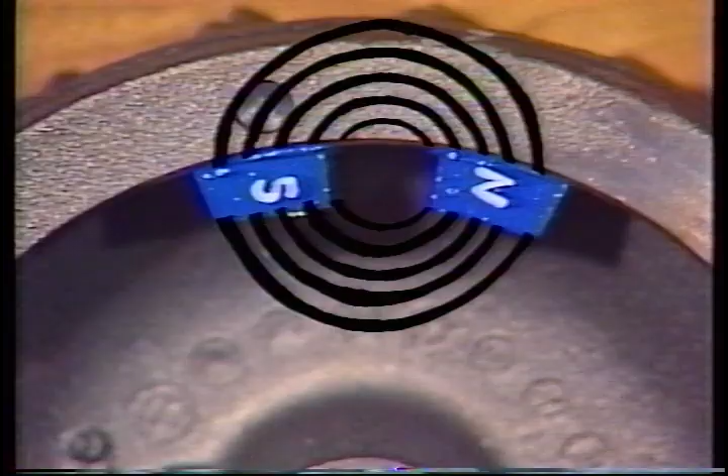The first item needed to create electricity in the ignition system is a magnet. There is a magnetic force field sent out between the north and south poles of a magnet. When a conductor is passed through this force field, electricity is generated. This conductor is the soft iron sheets that form the core of the system. The lamination core is riveted to the stator body.

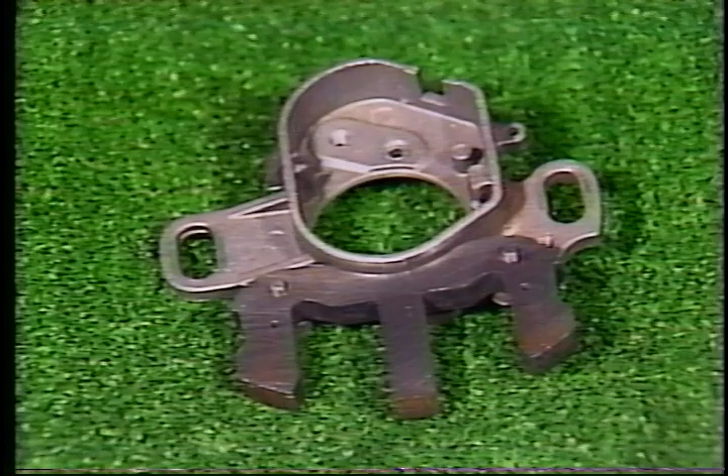When the north pole of the magnet is in line with the center leg of the laminations and the south pole aligns with the left leg, the magnetic force fields are routed through the conductor's center leg. As the magnet continues to rotate, the north pole aligns to the right leg of the core and the south pole is then located at the center leg. This reverses the direction of the magnetic force field through the center leg of the lamination, creating electricity.

This electricity passes through a primary coil of copper wire wrapped around the center leg. Let's take a look at how Tecumseh winds the coil primary. The primary is formed by winding copper wire a specified number of times around itself. The spray that is visible is acetone. This allows the wire to adhere to itself and form the core.

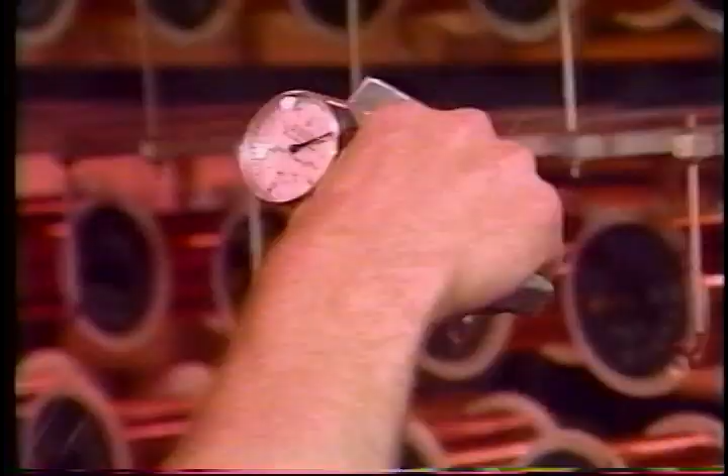To increase the voltage to an excess of 15,000 volts at the spark plug, a secondary winding of copper wire is required. The wire in the secondary winding is thinner than most human hair. The wire is soldered to the terminal connection. This connection transfers the electricity from the primary to the secondary.

The spindle will wind 35 secondaries at a time. The machine automatically cuts and inserts the paper insulator between every layer of wire. There are approximately 75 layers to each secondary.

The breaker points of the engine serve two functions in the engine. First, they stop and start the flow of electricity in the primary of the coil. When the points are closed, electricity flows in the primary. When they open, the flow of electricity in the primary is forced to the secondary windings. The voltage is increased and sent to the spark plug.

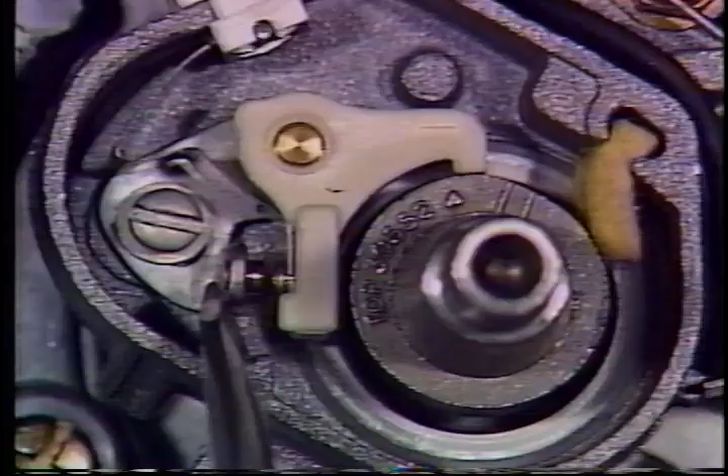The second function of the points is spark duration at the plug. The wider the point setting, the longer the spark is available at the spark plug. This ignition cam is the device that opens and closes the points. The cam has a high spot called a lobe to open the points at a set degree for the engine. The position of the magneto keyway in the crankshaft is what sets the dwell in the engine timing.

The cam wiper is a piece of oil-impregnated felt material that lubricates and cleans the cam. Re-oiling of the wiper is not recommended. It is best to replace it.

The condenser acts like a shock absorber in the electrical system. The condenser takes a charge and holds it until it is discharged. The charge of voltage is always the same. This prevents arcing at the points. The center of the condenser consists of two strips of foil separated by an insulator. The foil is tightly wound and placed inside a paper insulator so that it doesn't ground out against the condenser body.

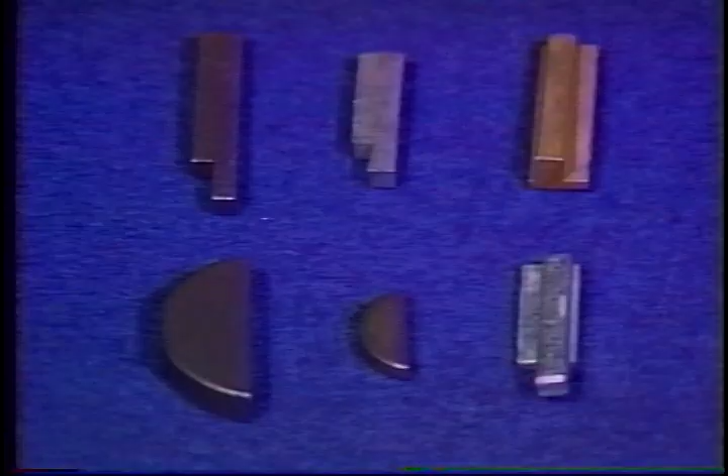The flywheel key is the device that properly positions the magnets in the flywheel to the magneto system so that the electricity is generated when it should be. When the 15,000 plus voltage is sent down the line, it exits at the electrodes of the igniter, known as the spark plug. The gap at the electrode also determines the way the engine will run.

If all of these components are put together, a complete standard point ignition system is formulated.

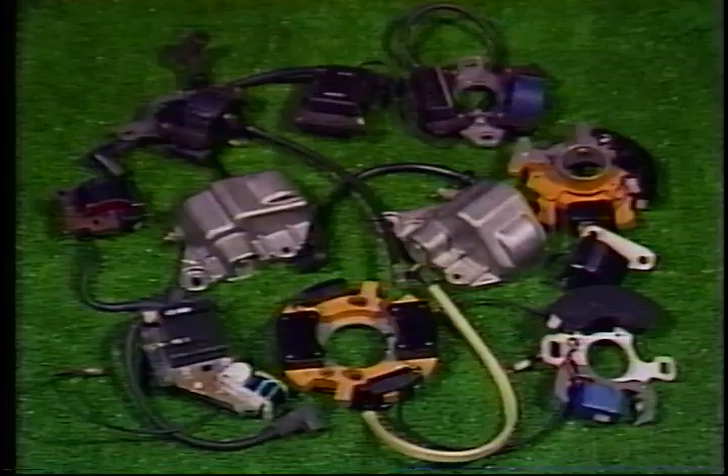There are several forms of solid-state ignition systems. The type that is going to be explained in this program is Tecumseh's capacitor discharge ignition, or CDI. Every manufacturer has a variety of systems and circuitry to achieve the same result. However, the same basic theory is used. It all starts with the rotating magnets in the flywheel passing the iron core laminations. This produces AC voltage.

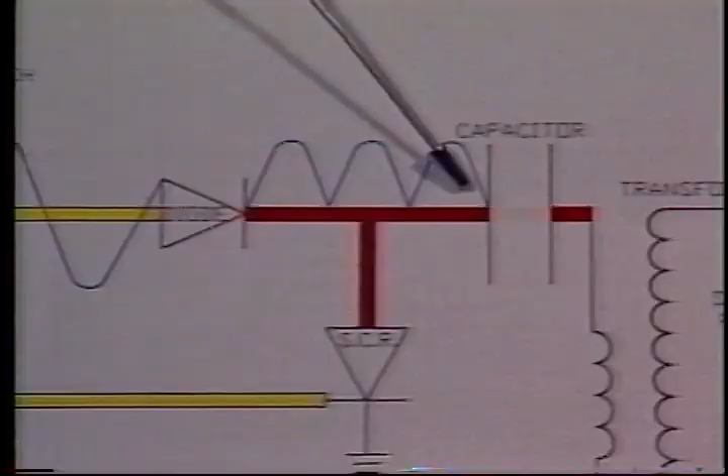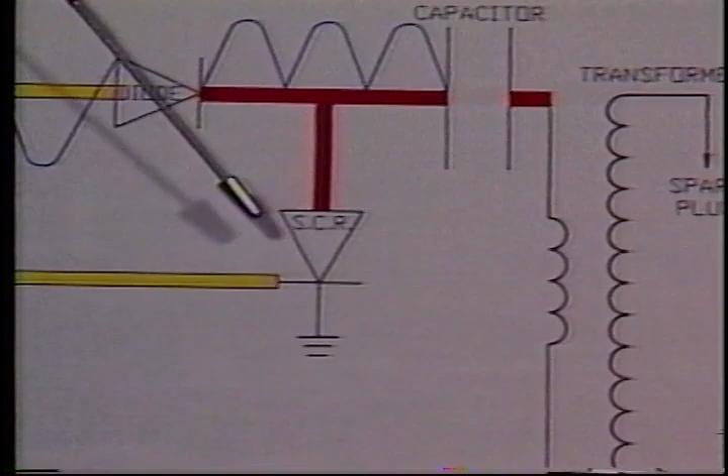There is a diode in series to convert the AC voltage into a pulsating DC current. The DC voltage charges the low-voltage capacitor. The capacitor serves the same function that the condenser does in the standard point ignition system. An electronic switch called an SCR turns on and off to unload and load the capacitor. The SCR is controlled by the small amount of voltage that is produced in the trigger coil of the module. When the SCR discharges the capacitor, the voltage is sent to the primary of the transformer.

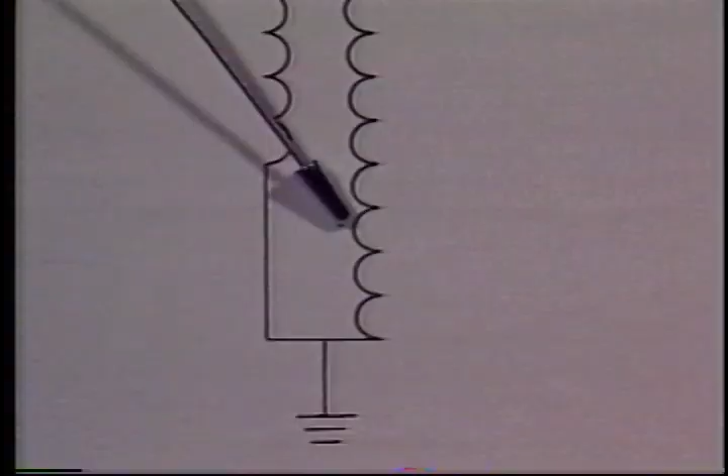There is approximately 190 volts in the module at this point. That 190 volts moves into the secondary windings of the coil and is stepped up to as much as 20,000 volts. The 20,000 volts is sent to the spark plug to fire the engine. The basic operating theory of standard point ignition and CDI solid-state ignition have been shown. One of the most important things to remember is that the ignition system is totally independent of all charging systems.

Excuse me, sir, what are you doing? Time out. What are you doing? Timing this engine. You're out of here.

We're going to talk about ignition timing today, but not in that sense. We're going to deal with timing solid-state ignition, the externally mounted coil with fixed-timed engines, and of course, standard point ignition. The simplest engine to time is the engine that is equipped with the externally mounted CDI solid-state ignition. The only tools that are required to time that engine are the 670297, 12.5 thousandths air gap gauge.

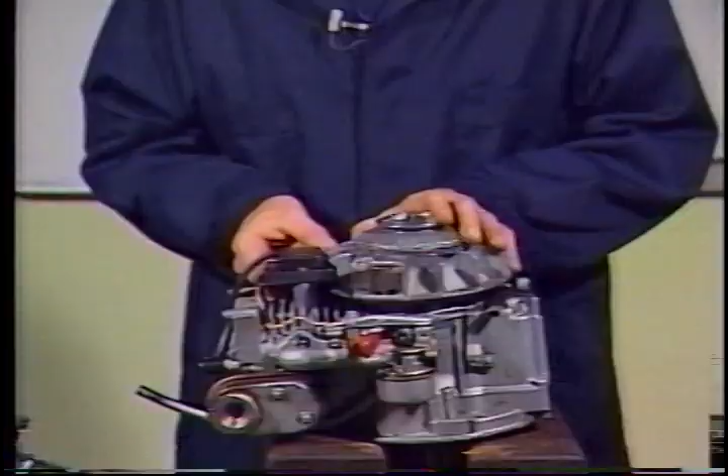You take the air gap gauge and place it between the flywheel and the solid-state module. You then rotate the flywheel so that the center of the magnets and the center leg of the lamination stack align. Once they have aligned, you can then loosen up the bolts holding the solid-state module to the engine. The magnetic pull of the flywheel will draw the laminations of the module to it. Once they've been drawn tight, you can then tighten up the screws again for the module, and then rotate the flywheel so that you can remove the air gap gauge.

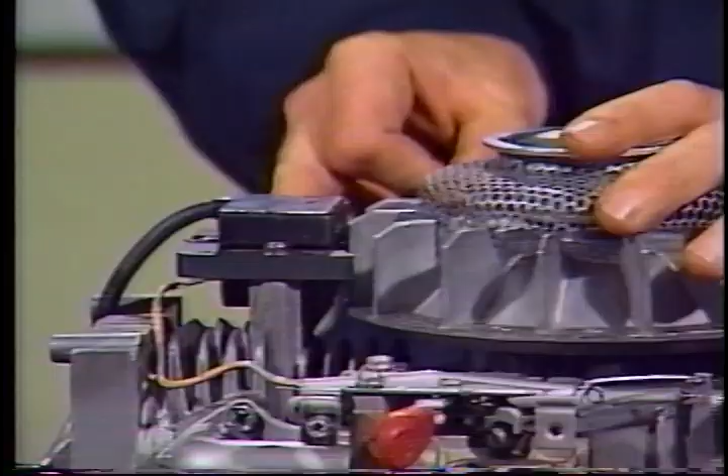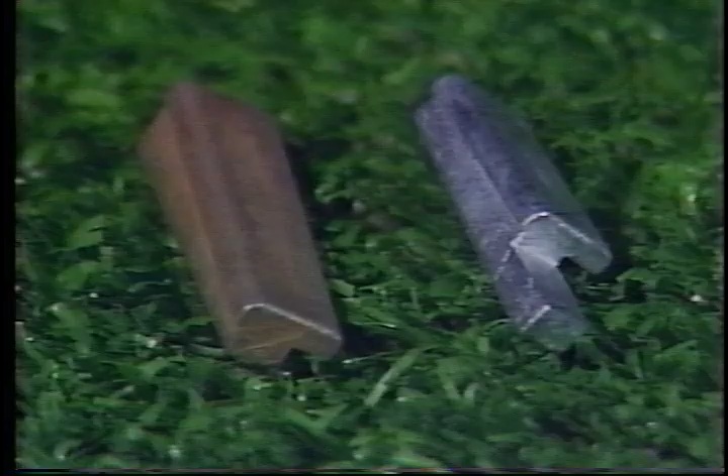One item you do want to check is you want to turn the flywheel to make sure that the magnets are not striking the laminations of the solid-state module. Another area that you want to make sure you have checked is that this engine uses a gold-colored flywheel key. The next engine that we're going to talk about will have the externally mounted coil and points and condenser underneath the flywheel. That engine will use a gray colored flywheel key.

When working with the engine with the externally mounted coil and points and condenser underneath the flywheel, it's as easy to time as solid state ignition with a few steps that we're going to show you. We have already removed the starter cup and flywheel nut, and as you can see by looking at the cord holes on the flywheel, we have used a flywheel puller to loosen the flywheel. It is very important that when working with two-cycle engines that you do not use a knockoff tool because of the needle bearings and ball bearings in some of the applications.

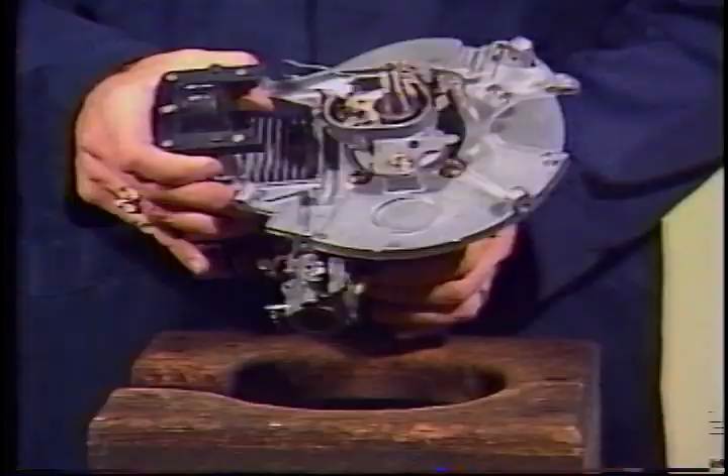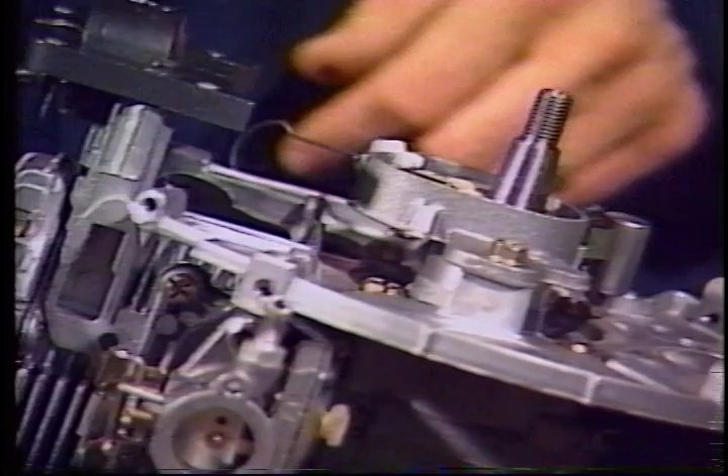After the flywheel has been removed, you can loosen the dust clip and remove the dust cover. If you're servicing this engine for the customer, of course you're going to change the points and change the condenser. After you have changed the points and condenser, to properly time this engine, rotate the engine so that the rubbing arm of the points is on the highest point of the ignition cam. Once the rubbing arm of the points is on the high side of the ignition cam, you can set your points.

Now with the externally mounted coil, the point setting on all engines is 20 thousandths. You can loosen the screw that holds the points down, and inside the stator body there is a casting so that the blade of your screwdriver will fit in there so that you can move the points out or move the points closer together so that you don't have to bang and push and pry the points open and misalign them. Now a thin blade feeler gauge generally works considerably better than the wide blade that I'm using now. But you set your points at 20 thousandths and tighten them up.

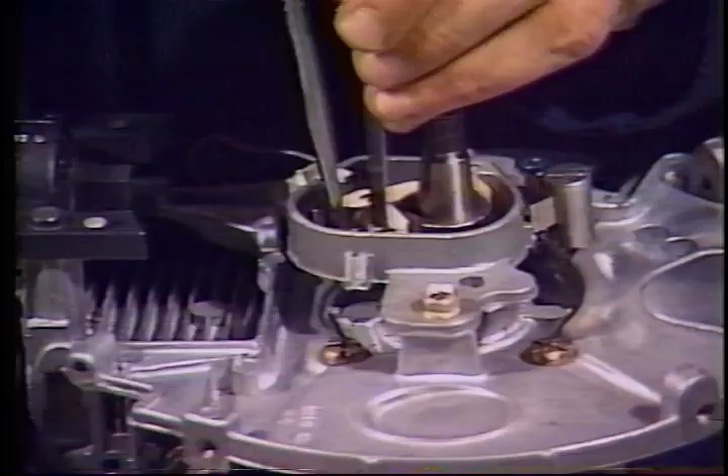I think a common complaint that I often hear is that the points have a tendency to spread when you tighten the screw back down. So you do have to be somewhat careful when you tighten them down to get them tight enough to hold, but not to force them out. And as we set points, we're all going to have a different feel on the feeler gauge for 20 thousandths.

After the points have been adjusted, you need to clean them. So you can use a piece of lint-free bonded paper. The edge of currency works well as long as you don't get the green ink onto the point. So put the white edge in there, close the points, and draw the paper through to clean your points.

I don't believe in using point cleaner because many times the contact cleaner that is used is to remove the oil from the contact points. The problem there is that when you spray it in there, you can also be removing the oil from the cam lobe wiper that's in there to oil the cam. So using contact cleaner is not a good idea. You can then place the dust cover back on and the clip.

Now on the two-cycle engines that have the externally mounted coil, we use the same flywheel for both two-cycle and four-cycle engines. In two-cycle engines, we use a gray-colored sleeve adapter. Put the sleeve adapter into the flywheel and press it down flush. There are two tabs inside this adapter that now act as your key. So align the adapter to the keyway so that the two tabs are in the keyway.

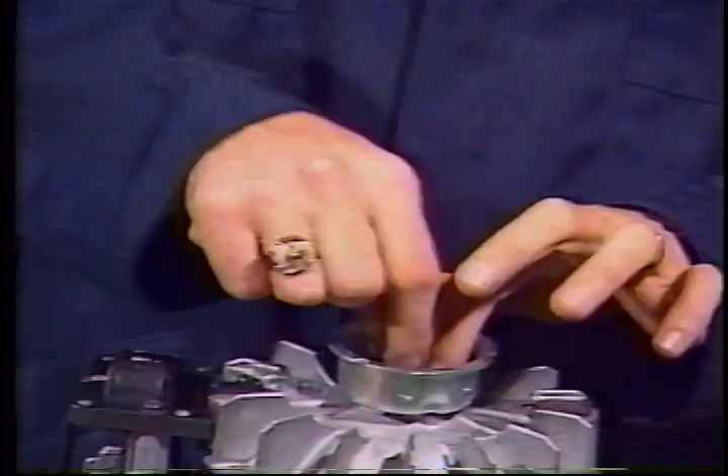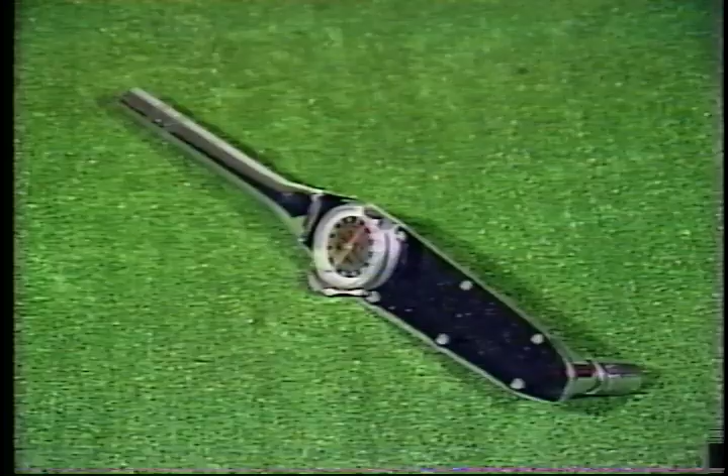Place your starter cup on and properly position it. Make sure that the crown on your washer is up and put your flywheel nut on. One of the most important tools that you will have as the service technician is a torque wrench. So make sure when you're working on any engine that you have looked up the specification for the flywheel nut and always torque the flywheel nut.

After you've torqued the flywheel nut down, again, take your 670-297 12.5 thousandths air gap gauge, place it between the laminations of the external coil and the flywheel. Rotate the flywheel so that the center leg of the lamination stack and the center of the magnets align.

And as before, loosen the bolts up and allow the lamination stack to be drawn to the magnet. You tighten the mounting bolts back up, rotate the flywheel, remove the air gap gauge, and again, check to make sure that your magnets are not striking your lamination stacks.

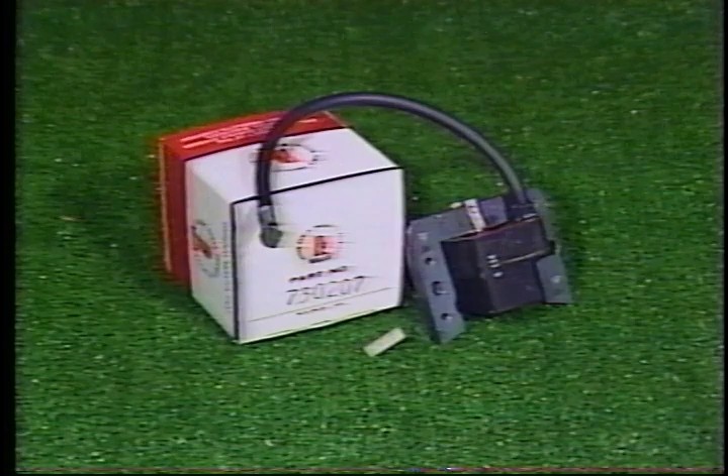An important thing to remember when talking about this externally mounted coil: if in your testing and checking with ignition testers you find that this coil is bad, you must be aware now that you will receive a 730-207 solid state ignition kit. The coil has been obsoleted, so you will get solid state ignition now. When you get solid state ignition and you have a 2-cycle, please make sure to remember to order the gold sleeve adapter. The gold sleeve adapter does not come with the 730-207 kit.

Now you have timed the engine and it can be put back together. That's the next simplest engine to time, the external coil, points and condenser underneath the flywheel. The final area that we want to address in ignition timing is the standard point ignition. The best place to start with timing and standard point ignition is in your mechanic's handbook. Turn to the proper section, chapter, and book that you're going to be using.

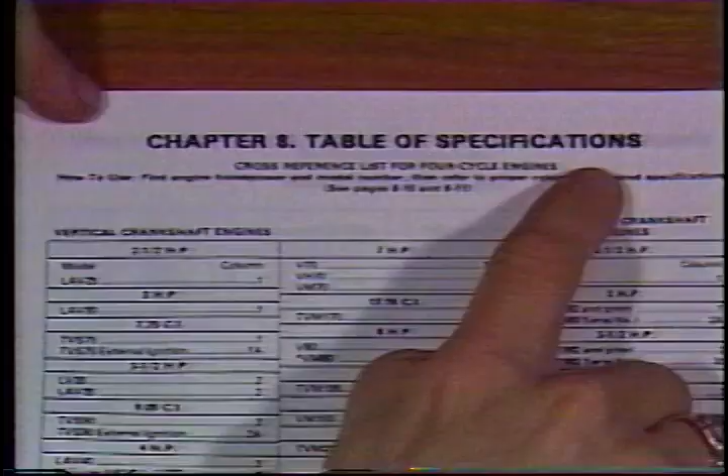Take your model number of your engine. The engine we're going to time today happens to be a V60. So in looking in the book, we find that V60 is located in reference column number 13. And turning to reference column number 13, we find that the before top dead center timing dimension is 80 thousandths before top dead center. We also find that the point setting is 20 thousandths.

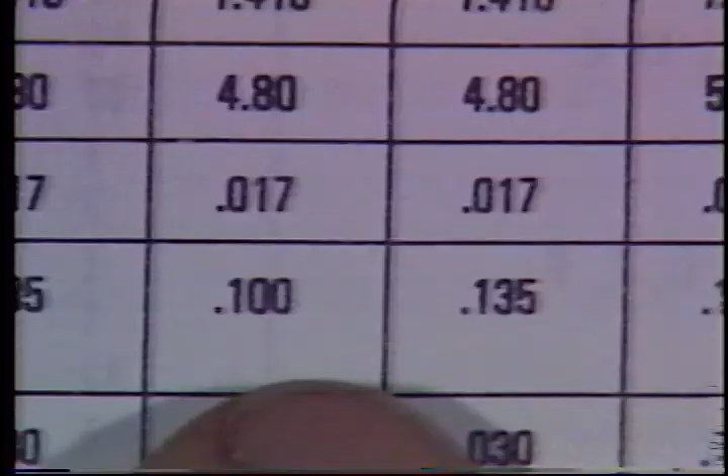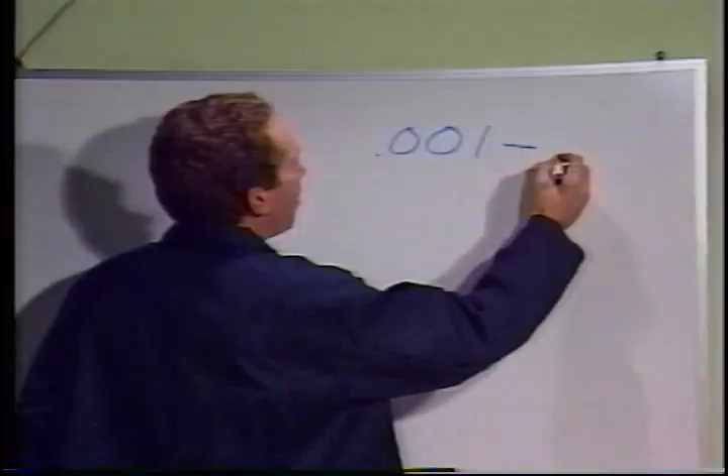An important thing to keep in mind is that not all engines have a point setting of 20 thousandths. Let's take a look in the 2-cycle book to show you an example of that. Now, as you scan the 2-cycle book, you will notice that not all point settings are 20 thousandths. Let's take a few moments and talk about point setting as it relates to timing. For every thousandth that you're off on your point setting, your timing is off 5 thousandths.

As we set points, we all know that we have a different feel on the feeler gauge for points. Your setting may feel like 23 thousandths to you. It may feel like 20 thousandths to me. Or to the gentleman here, it may feel like 17 thousandths. So it's important to get a consistent point setting and to time the engine.

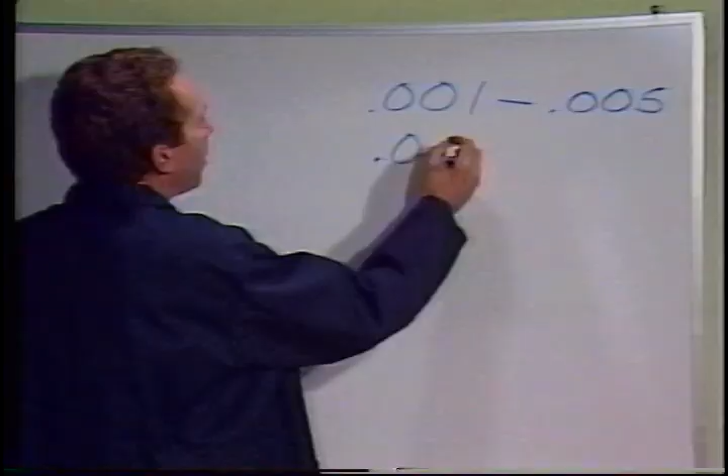In looking in the manual, we also know, as we've looked up, that the V60 engine that we're going to time has a timing dimension of 80 thousandths before top dead center. Let's take a moment and use the word that so many of us have always been told never to use, and it is not a 4-letter word, rather a 6-letter word, and that word is assume. And we know what assume does to you and to me.

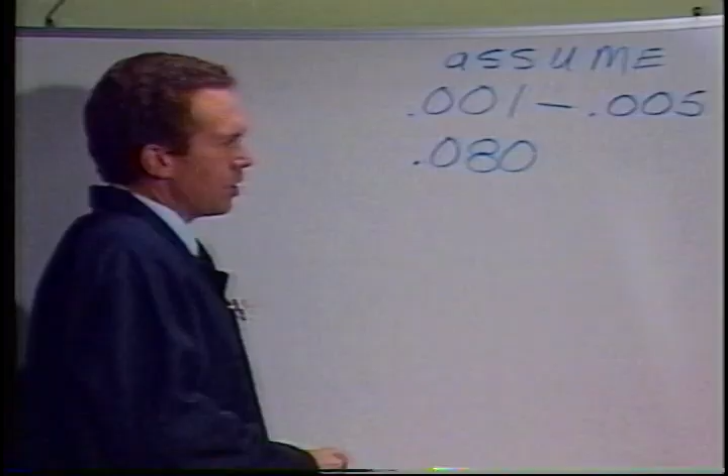So let's assume for a little bit what will happen to an engine if we assume they all have a before top dead center timing dimension of 80 thousandths. And looking in the book, we find an engine that is set at 60 thousandths before top dead center. We're now 20 thousandths out of time by an assumption.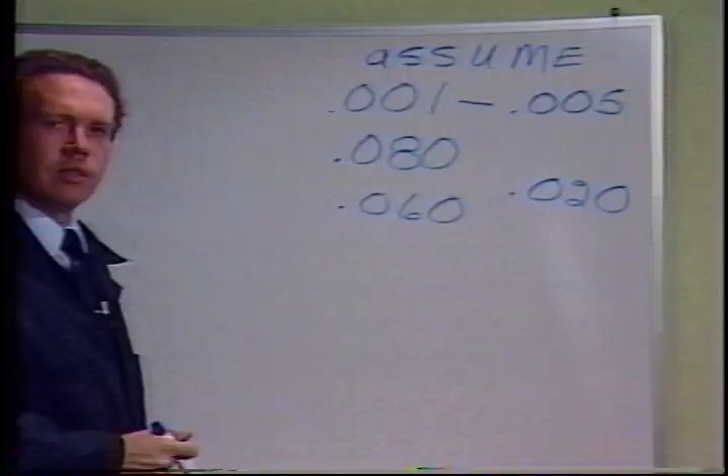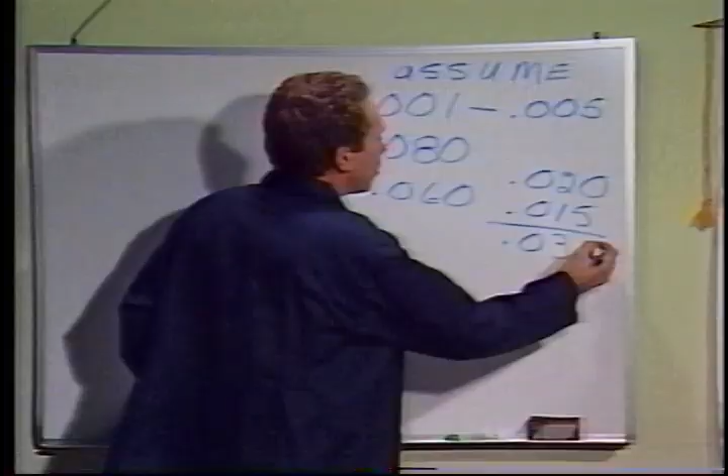And then the feel of the feeler gauge, which may feel like 20 thousandths to me and be 23 thousandths to you, we have a difference of 3 thousandths in the point setting. So therefore, we have a difference in timing dimension of 15 thousandths there. That gives us a total difference of 35 thousandths. The engine can be out of time that far just on point setting and not looking up the proper before top dead center timing dimension.

If that 35 thousandths is advanced, that's the engine that when you pull the recoil, it kicks back and it jerks your arm out of its socket, and we're all real thrilled about that. Or if that 35 thousandths is retarded, boy, that engine starts great, but it just doesn't have the power that it should when it's running.

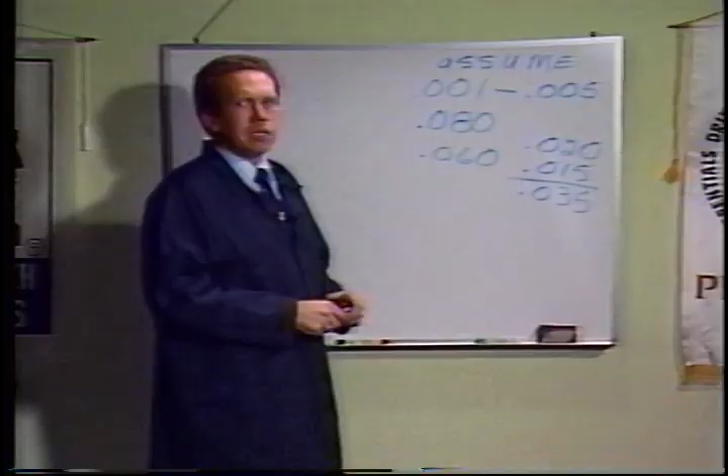So changing the points and condenser in the engine and the proper timing is to use the proper timing dimension, because the statement has been made so many times is, all I changed was the points and condenser. So therefore, I don't have to move the stator plate. All I did was change the points. Well, changing the points can throw you completely out of time with the engine. So it is important. And let's go back to the bench and go through ignition timing of the standard point ignition.

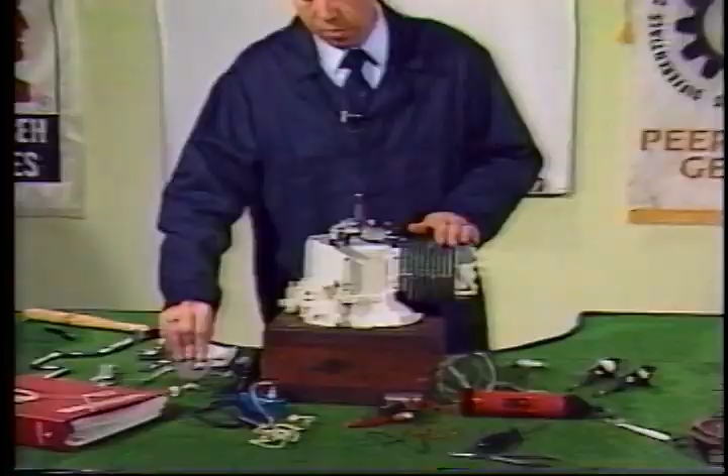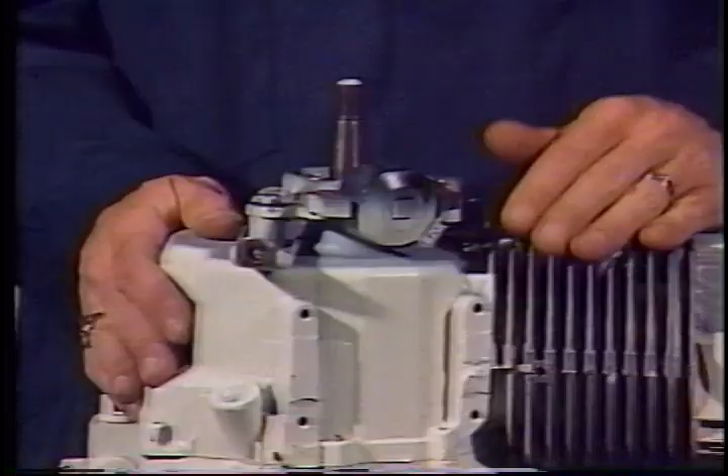After the flywheel has been removed from the engine, we can then get to the ignition components. First, we want to remove the spring clip that holds the dust cover onto the stator assembly. We can then change our points and our condenser and felt wiper for the cam lobe if necessary. We're going to point out some things that are important during this presentation that many times are overlooked and can cause ignition problems as far as timing goes.

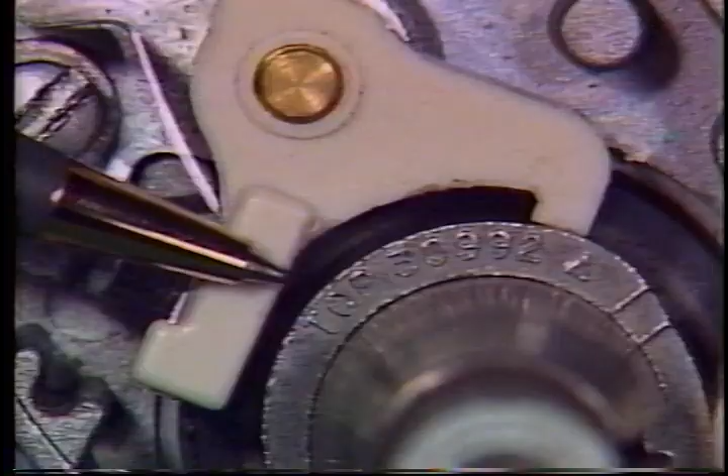One of those areas of concern is many times the ignition cam. The ignition cam has a giveaway that tells you the direction that it goes in. If you look on the ignition cam, it will tell you top. So therefore, it goes in so that it says top is on top. We have seen at times when the ignition cams have been put in upside down and the engine is 180 degrees out of time.

After the new points and the new condenser are in, let's begin to time this engine. Now there are a number of ways to find the high side of that ignition lobe. If the engine is out, many times you can reach underneath and turn the crankshaft of the engine by hand to find that high point. Or if you take the key, place the key back into the keyway, you can then use a wrench.

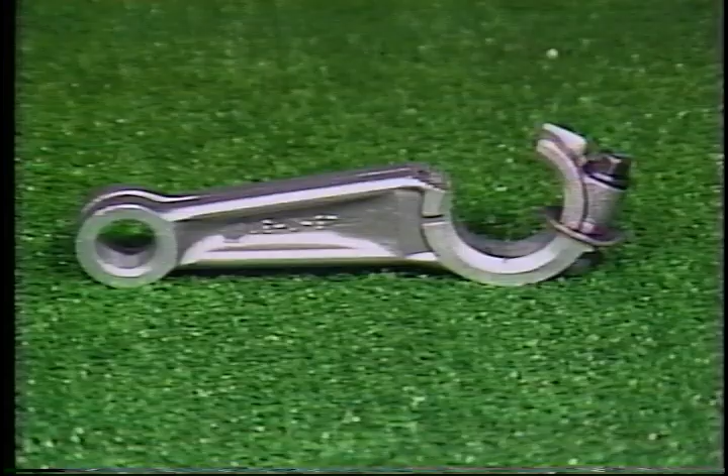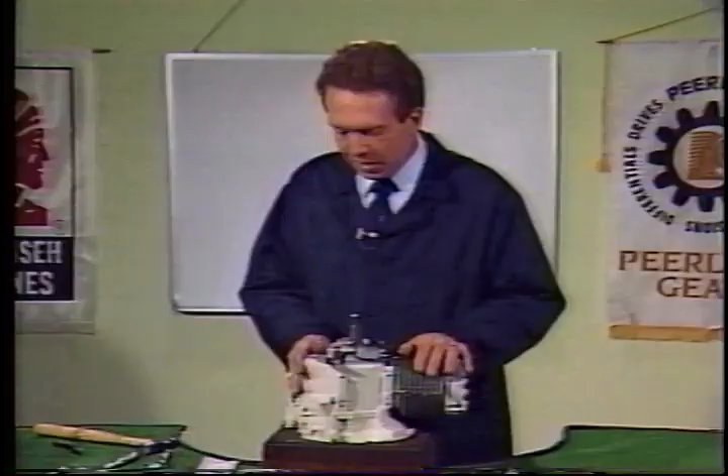Or one of the other ideas passed along to us by a servicing dealer was to take a connecting rod, cut the cap in half, place a washer between the leg of the rod and the cap, bolt it back together, and use the washer in the keyway to help turn the crankshaft. They all work well. Vice grips and the like on the taper of the crankshaft is obviously not a good idea. So now we have rotated the crankshaft in the engine so that the rubbing arm of the points is on the high side of the ignition cam.

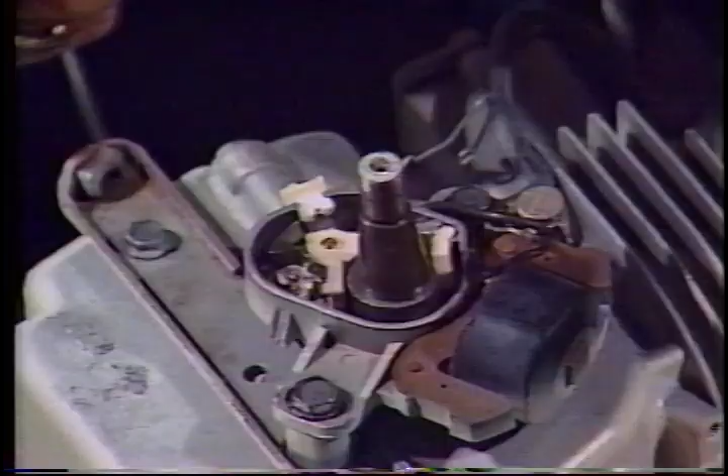It's now time to set our points again. And just as before, we can loosen the adjusting screw. This is a 4-cycle engine. We've looked in the manual. We found that the point setting is 20 thousandths. And again, we can use the boss in the stator body so that we can tighten the points. Now if you pull that feeler gauge out of there and it snaps, you know that your points are a little bit too tight. So loosen them up and again reset your points.

Setting the points should be done with a feeler gauge. It should not be done with the old business card trick or the matchbook cover. Those things do not condone good point setting. So make sure that you do use a 20 thousandths feeler gauge if it calls for a 20 thousandths point setting. After the points are closed, we want to find the proper before top dead center dimension.

The 670-241 dial indicator is the tool that we highly recommend for you to use. It comes with a thick leg up here in the adapter collar, and it has a thin tip on the leg of the dial indicator. When it comes to you, this leg will be straight.

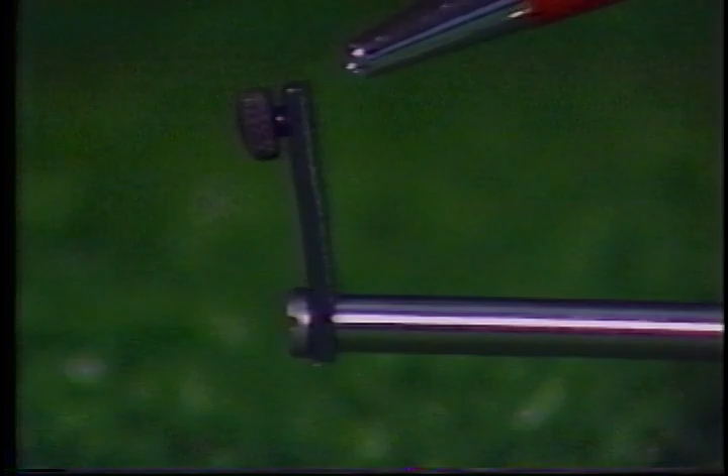One of the service tips that may help you is what we do is we take this leg off from the dial indicator, put it into the vise, and put about a 10-degree bend in the leg of the dial indicator. Then I use the thin tip, and the reason that I put that bend in the leg of that dial indicator is so that when you have the heads with the higher fins, especially in the 8 and 10 horsepower engines, you can then get the dial indicator into the spark plug hole of the engine.

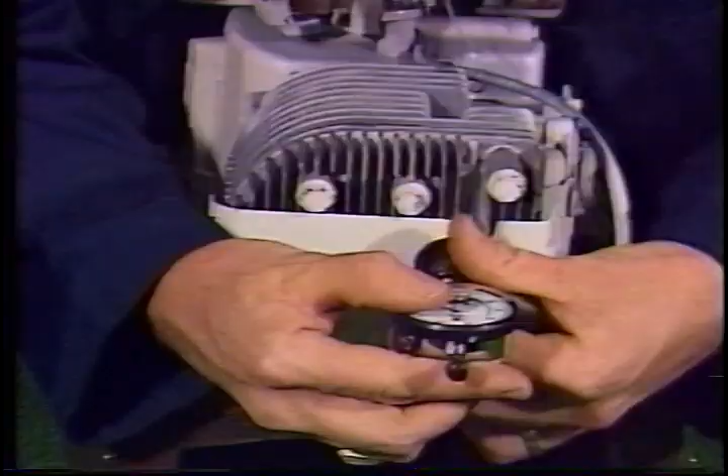Then when you insert the dial indicator, make sure that the leg on the dial indicator is over the piston. A number of technicians out there have been known to measure valve travel instead of piston travel in the engine. I always place the dial indicator in probably 1 to 3/4 inches or thereabouts so that I know I have plenty of travel on the dial indicator to find my top dead center dimension.

The one thing you must remember is that all of our engines from the magneto end run in a clockwise rotation. So therefore, to find the proper top dead center dimension, after I have set my points on the high side of the cam, I like to turn the engine counterclockwise just a little bit. And then I turn it clockwise until the needle on the dial indicator stops and changes direction. Where it stops is top dead center. You can then loosen the dial on the dial indicator and zero it out.

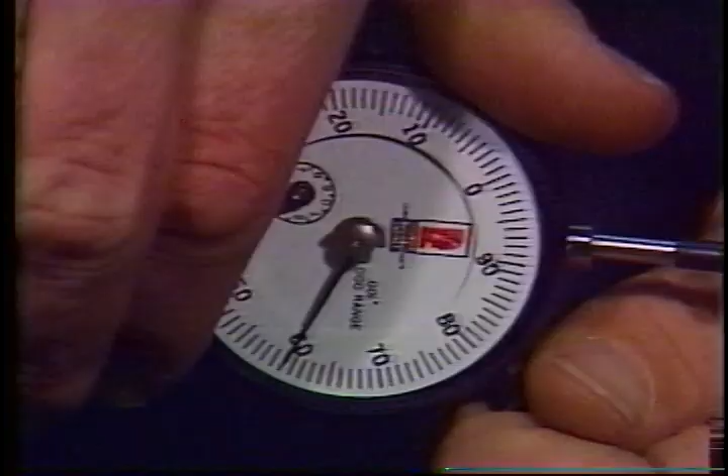Now we want to go 80 thousandths before top dead center with this engine, so therefore we must turn the engine counterclockwise. I turn the engine past the 80 thousandths and then turn it back clockwise to 80 thousandths. The reason that I do that is it takes any play or slop that there may be from wear and time in the bearing surfaces out of the engine. It's coming back up on the compression stroke.

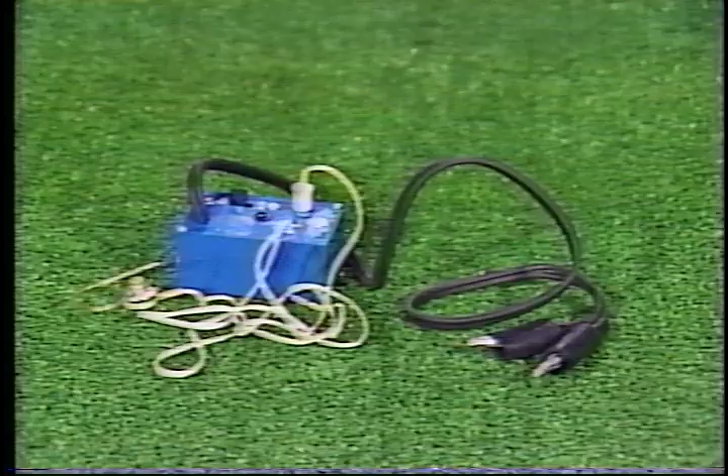Now the next item that you have to find is, when do your points open? Because as discussed in the theory portion of the program, when the points open is when the engine fires, and now you have the 80 thousandths timing dimension set, and that's when you want your points to fire. To find out when they fire, there are several items that you can use. Some of them are what are called a buzz box. You put the earphone in and you listen for a tone change or the buzzing to stop completely, and that tells you that your points are open. You can also do that with a voltmeter to find that continuity break.

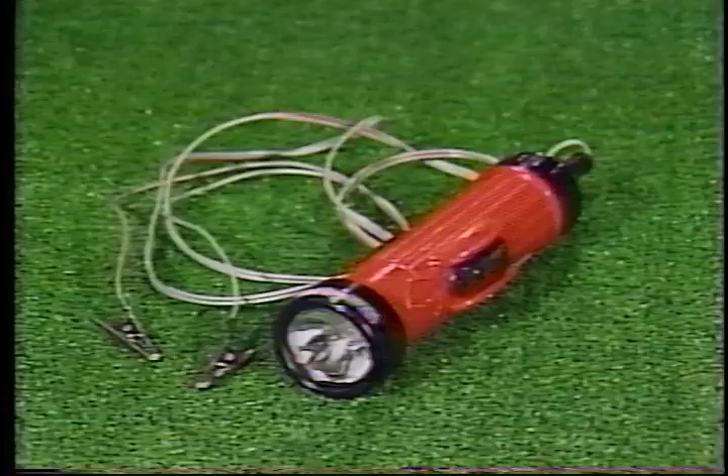I prefer using the continuity light so that when the points open and close, you get a definite way of telling you that there is contact made or not made. So I prefer using the continuity light. One important area to remember when using the continuity light is that you have put the nut and washer back onto the point post terminal. A lot of fellas put the points in and do not put the nut and the washer back on.

And the problem that happens there is that when you do not have the proper spring tension onto the spring of the points, your point air gap and point setting can change as much as 3 thousandths. So we go back to that dimension that we talked about before of every 1 thousandth of your point setting being 5 thousandths in the timing dimension. If you don't have this nut and washer in place, you're talking up to 15 thousandths out of time once you tighten that nut and washer back up onto your point post terminal. So when you're timing the engine, make sure that you have the nut and the washer on that terminal.

Another important thing to remember is to know your equipment. There are some continuity meters that are set up to bypass the condenser when it's in the system. However, my continuity light is not, so therefore I have to make sure that the condenser is disconnected from the point post terminal. Otherwise, the charge from the battery will charge the condenser and I will not get a definite difference in my continuity meter. Take one end of your continuity meter and hook it to the point post terminal, the other to good ground on the engine. Now you can see in this case I have continuity already through my meter.

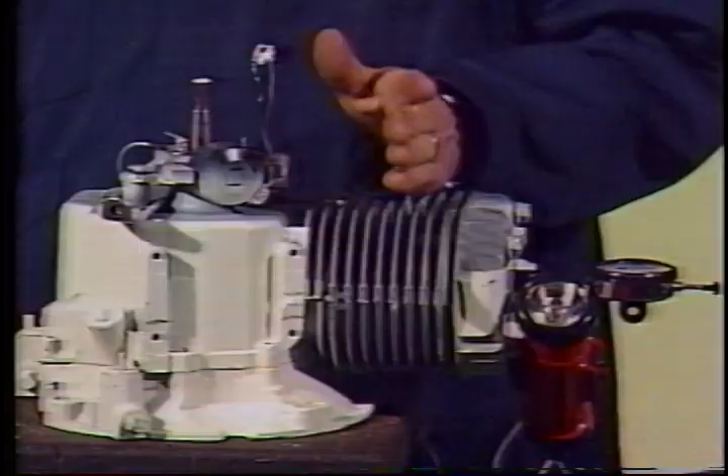Contrary to popular belief, you can in fact use a hammer on an engine, but we're going to show you how to use it correctly. We're going to fine tune with this hammer, and that doesn't mean beating the daylights out of this stator. So we'll tap a little bit that way. You can see the continuity light went out again. We'll tap back that way a little bit and back the other way. Now it doesn't take a strong force to do that.

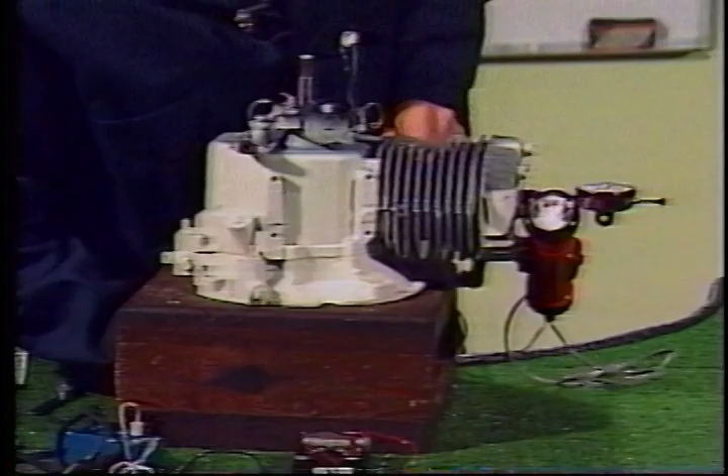You may find that as you tighten up the stator bolts, the light may come on, but you can check to see where the engine is firing. Simply reach underneath, take the PTO end of your crankshaft, and rotate the engine until the light goes out. Now this one happens to be going out a half a thousandths off. In other words, it's firing at 79.5 thousandths before top dead center. We like to see you when you time engines to be within 0 to 3 thousandths plus or minus in your timing dimension. However, the engine will run and run properly plus or minus 5 thousandths from that timing dimension.

Once you have set the timing, you can disconnect your continuity meter and take an 11/32 wrench. The reason I mention that is 11/32 is generally considered an ignition wrench, and that's the size that you need for the nut on the point post terminal. Take the nut and the washer off, route your primary from your coil and the wire from your condenser underneath the dust cover clip, so that the dust cover clip can hold your wires away so that they do not rub on the flywheel and cause the engine to short out. Put your washer on. If you have a stop clip for ignition ground, make sure you put that on, and then put your nut back on and tighten them up.

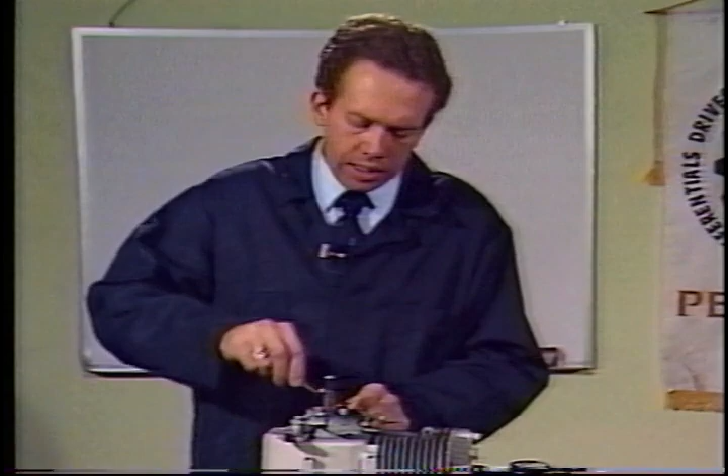A common mistake that's made in ignition timing is that after the technician sets the timing, a lot of times they want to go back and reset the points. If you go back and reset the points, then you have to retime the engine again. Rotate the crankshaft so that the rubbing arm of the points is on the high side of the cam. Again, take your lint-free paper, put it in between your point terminals, close the points, and clean them. Again, not recommended to use the point solvents.

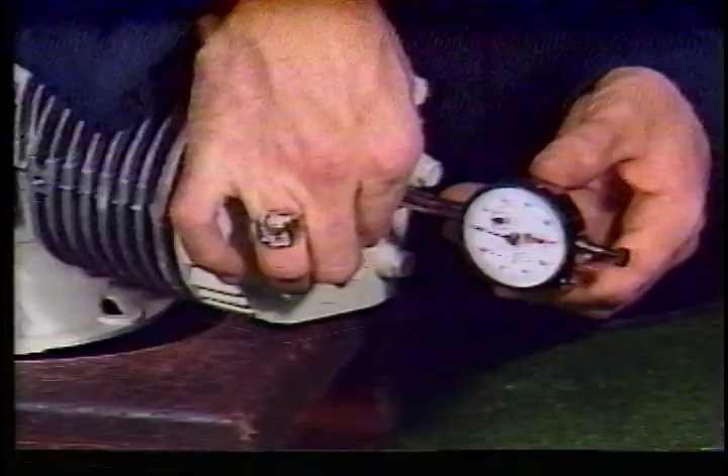You can then loosen the adapter, remove your dial indicator from the spark plug hole. Make sure in this case that you turn the adapter and not the dial indicator, because the screw that's on the end is a self-tightening screw, and by turning the entire dial indicator, many times that leg and tip and screw will end up in the combustion chamber. So make sure you turn the adapter sleeve and not the entire dial indicator. Place your dust seal back on and your spring clip. And that's all there is to timing the standard point ignition engine.

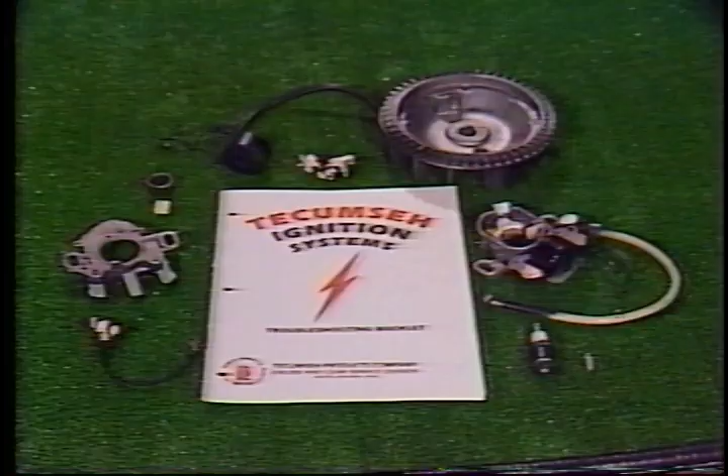Troubleshooting an ignition system can be rather frustrating for some technicians. By reviewing the basic theory of ignition systems and the importance of having the engine properly timed, a lot of these irritating situations can be resolved. There are a number of problems that may appear to be ignition related and are not. Let's take a look at some of these. When the engine backfires through the carburetor, the first culprit to blame is always the ignition system. In order for an engine to backfire through the carburetor, one condition is always present. The engine's intake valve is open. Therefore, a number of checks must be made to pinpoint the exact problem.

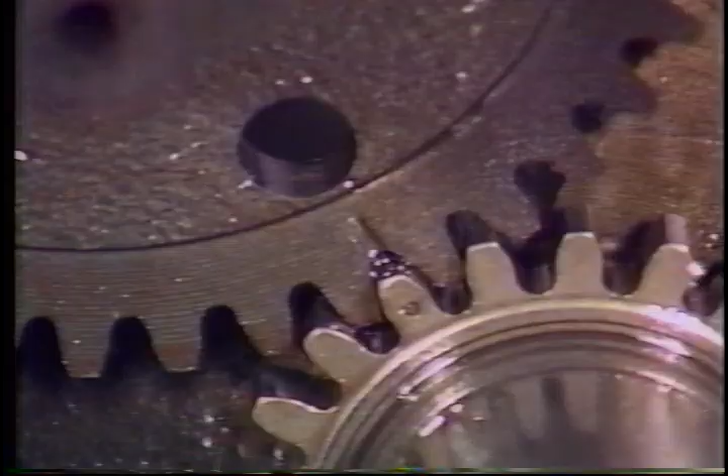Number 1. Is the intake valve warped, burned or carboned up so that it is not seating? 2. Is the camshaft properly timed to the crankshaft gear? The scribe mark and hobbing hole must be in line with the chamfered tooth or dimple on the crank gear. The only exception to this rule was the old Craftsman engine with the ramjet carburetor. Another important thing to remember with the valve timing is that sometimes the sudden stop to an engine does more damage than just shearing the flywheel key.

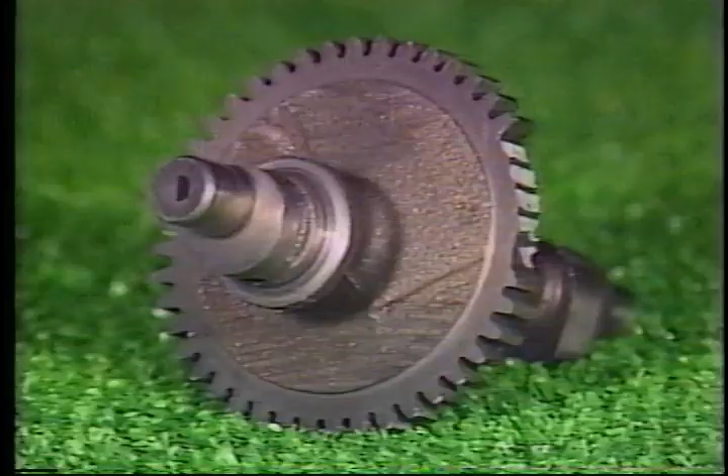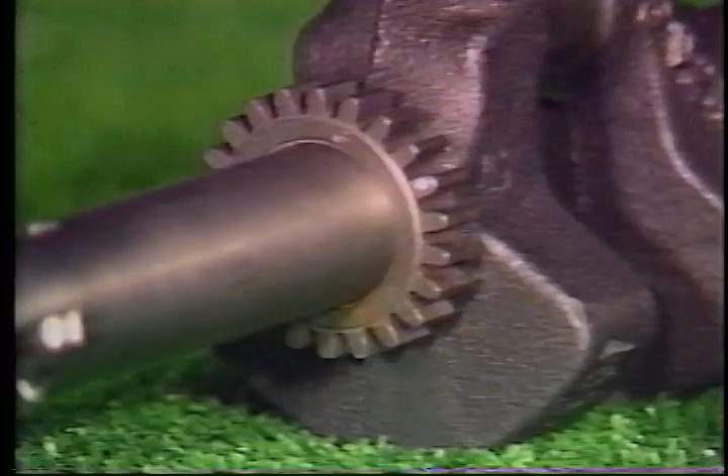Camshaft teeth have been known to break, as well as the crankshaft gear. With the pressed-on crank gear, it sometimes spins on the crank. The correct location for this dimple or chamfered tooth is approximately the 2 o'clock location when the journal is at 12 o'clock. An easy way to check this without tearing the engine sump apart is to watch the valve action as the piston moves up in the bore on the compression stroke. This will allow you to see if the fuel is getting in too soon or too late.

Third, as mentioned earlier, is the flywheel key sheared from a sudden stop? Has the proper flywheel key been used, and has it been positioned properly? And finally, has the engine been timed properly? If the timing is advanced, the engine will fire while the intake valve is still open, causing backfiring through the carb.

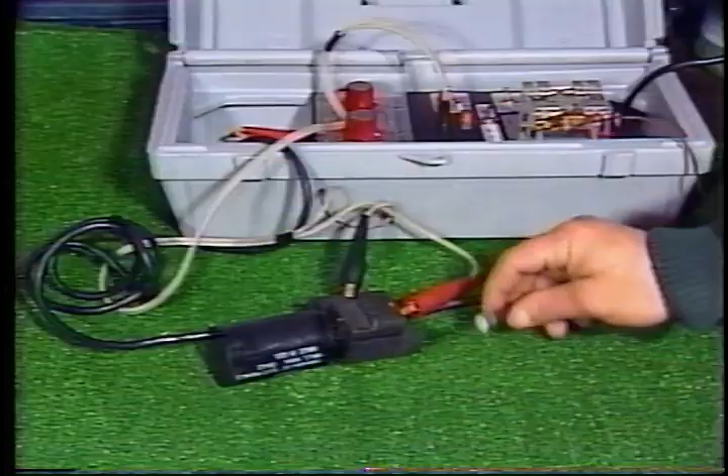There are several ways to check for spark. Let's look at the safe ways. The safest way to check for spark is to hook up a spark tester to the lead wire and to the plug. A hot, bright blue spark should jump the gap. If the spark is orange or yellow, the engine will not fire under compression. Checking some solid-state modules without having the secondary of the unit grounded can cause failure to the unit.

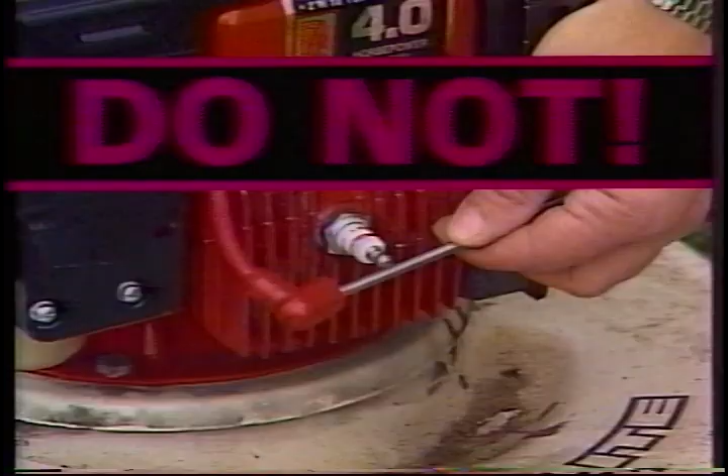If the engine has been taken apart, there are a number of suitable testers to check the components. The use of some of these testers will be shown later. It is not a good idea to check for spark with the lead wire disconnected from the spark plug. The possibility of shock is great. An extremely dangerous method that should never be used is to remove the spark plug and check for spark. Gas will be sent out the spark plug hole, and any type of spark or flame could ignite, causing a fire. Never use this procedure.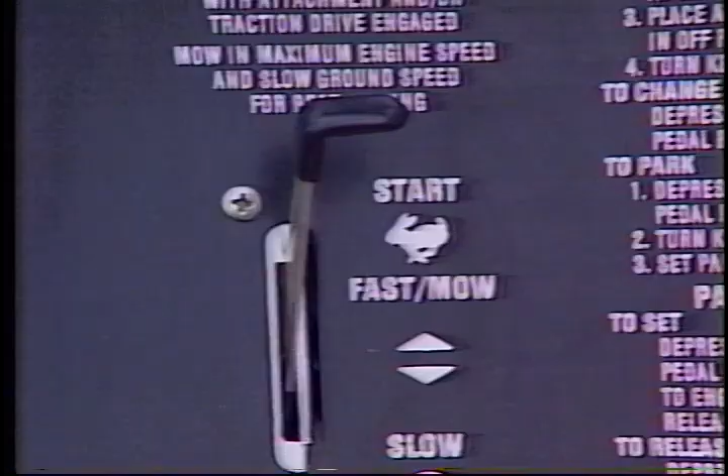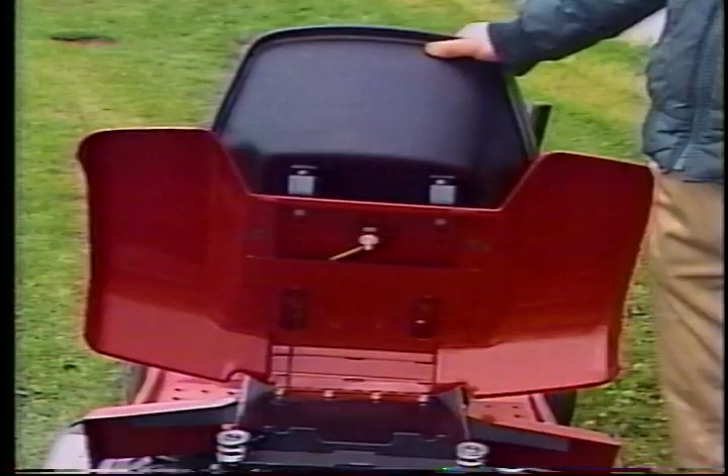If a spark is not present, make the following checks. Has the control been moved to the start or run position? Is the engine ground wire damaged? Has a bare spot been rubbed in it, causing the electrical current to ground out? When it's possible, isolate the engine from the equipment. With the numerous safety switches in use, it's possible that they may be at fault. If this is the cause, all new ignition components and your time won't help.

A faulty key switch can also lead to a grounded ignition system. In some cases, with a bad switch, battery voltage will be fed back up the ignition ground wire and destroy the electrical components. Double-check the wire on the equipment and the polarity of the battery. Reversing the polarity will also destroy the ignition components.

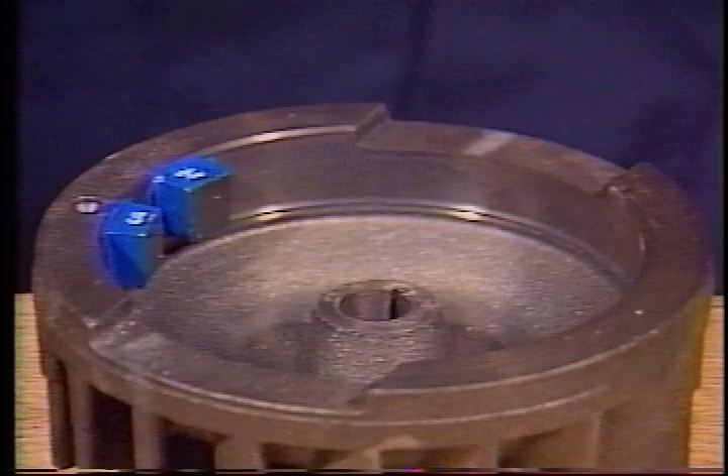Another instance of no spark may be in fact that the magnets have lost their power. It is very rare that the magnets lose their magnetism, but it can happen. The only practical way to check the magnets in a repair shop is to place the flywheel on a wooden surface. Grip a long screwdriver by the handle. Move the blade of the screwdriver to within 3/4 of an inch of the magnets. If the blade snaps to the magnets, they still have sufficient strength.

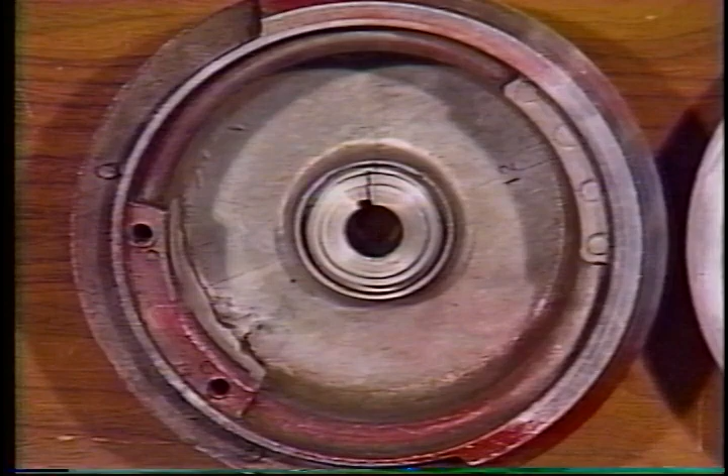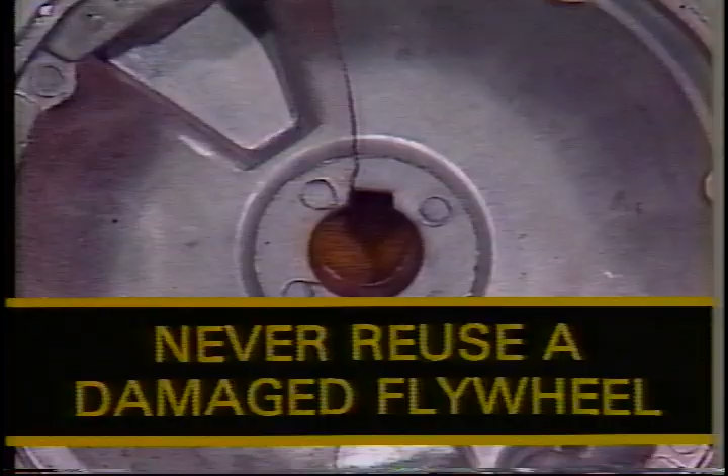In checking the flywheel, make sure that it is not damaged. While looking at the flywheel, if there is a crack to the right of the keyway, that indicates a severe sudden stop. If the crack is to the left, it is a sign of improper torque to the flywheel nut. Never reuse a damaged flywheel.

The statement has been made that the engine is backfiring at the muffler. Flames are shooting out. This condition is generally not an ignition problem unless the timing is so retarded that all of the fuel in the combustion chamber is not being burned. The excess fuel is sent into the muffler on the exhaust stroke of the engine and is ignited by the heat of the muffler. This condition is generally the result of too rich a carburetor setting or a leaking exhaust valve.

Timing a Tecumseh engine properly is critical. An engine that is out of time just will not perform satisfactorily for anyone. An engine that has the time too far advanced will kick back, possibly causing injury to the operator. An engine with retarded spark starts easily but lacks power when it needs it. When the engine is timed properly, it will start easily and respond to the power demands of the equipment.

We have mentioned a number of conditions to look for when troubleshooting ignition systems. Well, how do you check the actual ignition components?

Good evening. Thank you for joining me this evening for a very enlightening, informative, and very interesting game of ignition checkers.

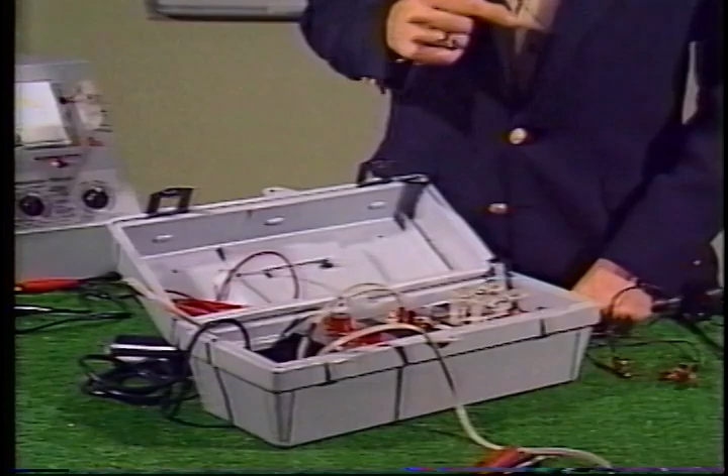If so, then perchance you'll want a piece of test equipment similar to the one here that has the needle indicator and will give you those readings and the scales to read them. If that's the type of test equipment that you prefer, then this may be the style that you want to purchase. If your concern is whether the component is good or bad, and that's all you want to know, then you can buy a couple other versions of the testers that are a go, no-go version, and there are several styles available on the market.

Another thing that's important when looking at test equipment is to find out what the test equipment will test. Not all the test equipment will check solid state ignition, as an example. So there's no sense in making that investment in today's day and age of solid state ignition if your component tester will not check solid state ignition. So make sure that your equipment will do what you want it to do.

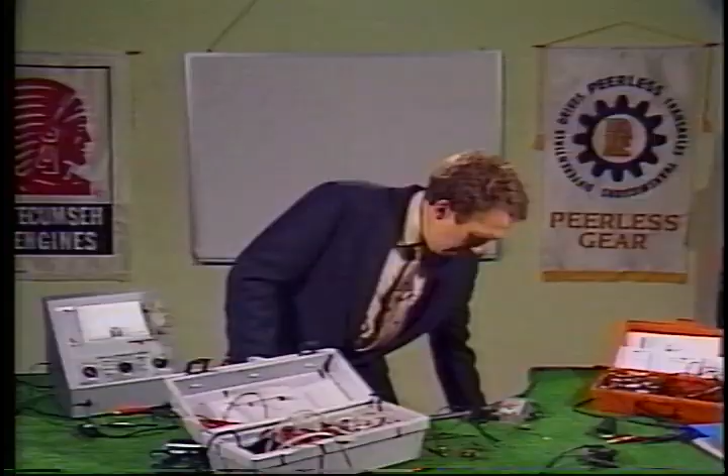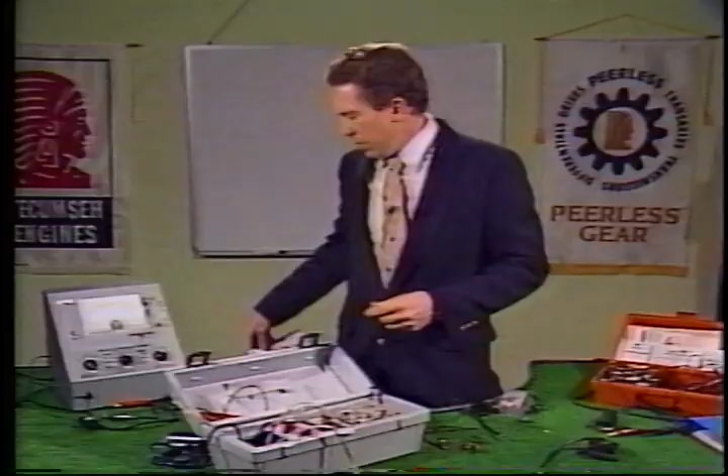Let's take a couple moments and show you how one tester works real quickly, which is the go, no-go type tester. The unit that I'm going to demonstrate today is the Graham Lee 31 SMXH. The tester is relatively easy to use. You connect the probes as the color key shows on the tester. You can turn the tester on, and by looking at the amber light on the tester, you can see that you have continuity.

Let's make a relatively quick and easy check on a coil. The short wire with the eyelet on the coil is the ground. So we hook the black lead to the ground. We can hook to the primary of the coil and see that we have the amber light glowing again. That tells us that we have continuity through the primary of the coil. If you disconnect the red lead and touch it to the spark plug end of the coil, you can see that we have continuity through the secondary of the coil. The continuity check mainly tells you that you do not have a break in the windings of the coil.

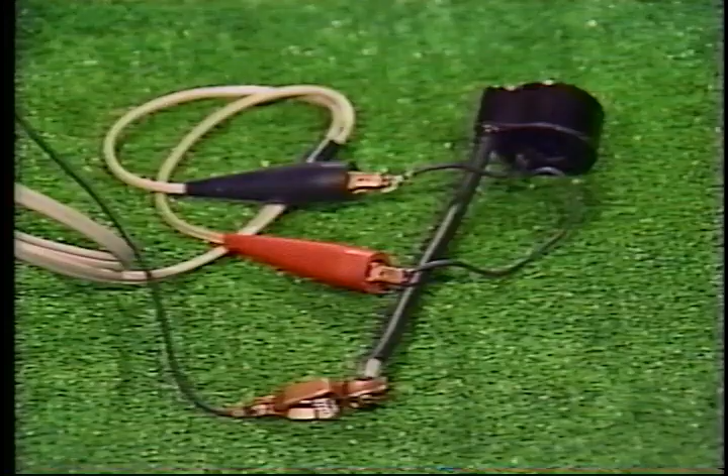The true test for the coil is in fact a power test. So we have the black lead hooked to ground, the red lead hooked to the primary. Then we take a jumper and hook from the secondary to the air gap of the tester. Now, in reading the manual, you will need to know the part number of your condenser, of your coil, and the test procedure.

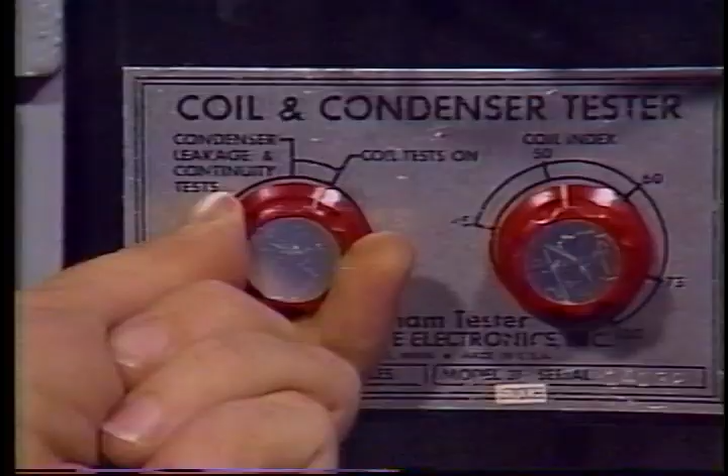On this tester, we're going to want to turn the knob to the left, which is a spring-loaded knob, to the on position, and then rotate the indicator until the coil fires. We can take the reading and see that this coil is firing at about 51 on the scale. The coil must fire before it reaches 60. Now that's a quick and easy check for checking out a coil.

The test booklets are written well so that the checks are easy to make and easy to understand. And it only takes you a few seconds to hook them up and make the checks to see if it's the ignition component itself that's causing your problem with the ignition system.

In the program today, we've talked about basic theory of ignition systems, timing the engine, troubleshooting, and now ignition test equipment. We hope that this program has given you different aids and directions to help you in the troubleshooting and the repair of Tecumseh ignition systems.